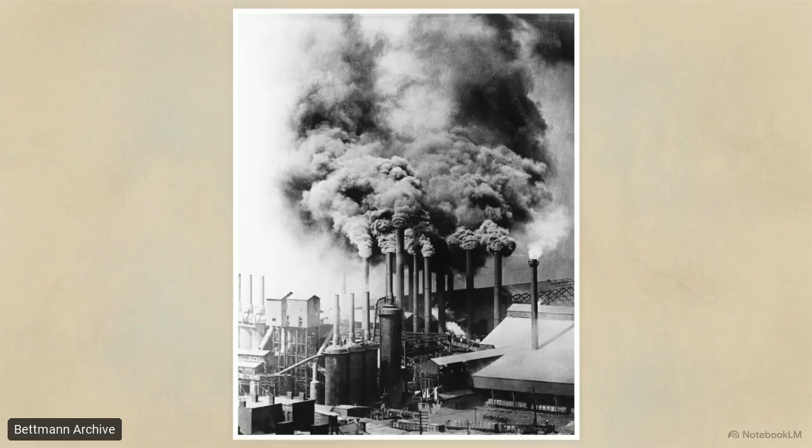For two centuries, building a global industrial power required accepting two massive realities: staggering capital expenditures and severe environmental degradation. It also required locking entire economies into fragile, centralized shipping networks, where a single delay at a major port could ripple across the globe. Additive manufacturing offers a different route.

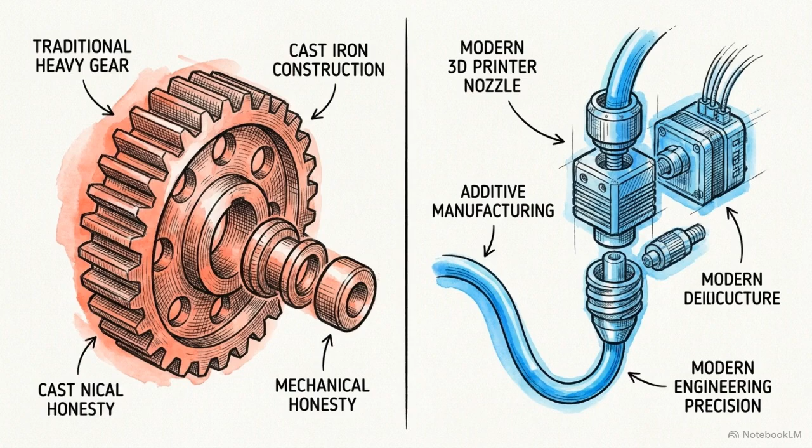By shifting from physical machining to digital to physical fabrication, African nations can leapfrog the heavy capital requirements of 20th century legacy infrastructure. Instead of relying on a single, centralized hub pushing goods across vulnerable oceanic trade routes, production can be distributed into localized nodes right where the demand exists.

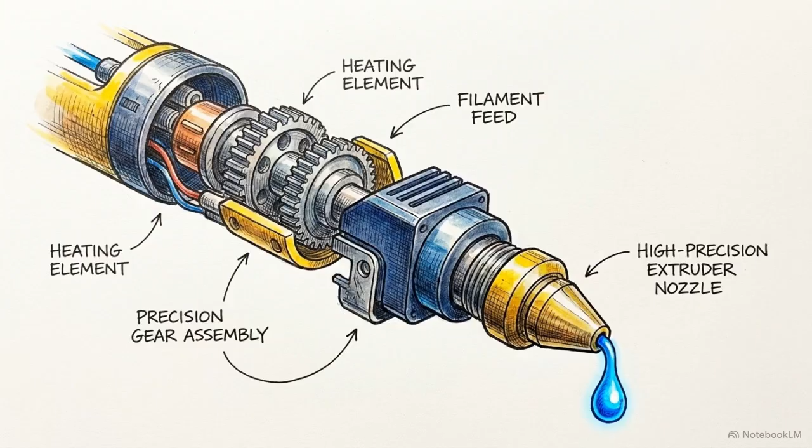There is, however, a catch. Deploying a fleet of robotic extruders or metal powder bed fusion machines accomplishes nothing without a workforce actually capable of mastering digital design and systems engineering. Hardware procurement cannot buy industrial sovereignty. That requires a systemic recalibration of how an entire generation learns to solve problems.

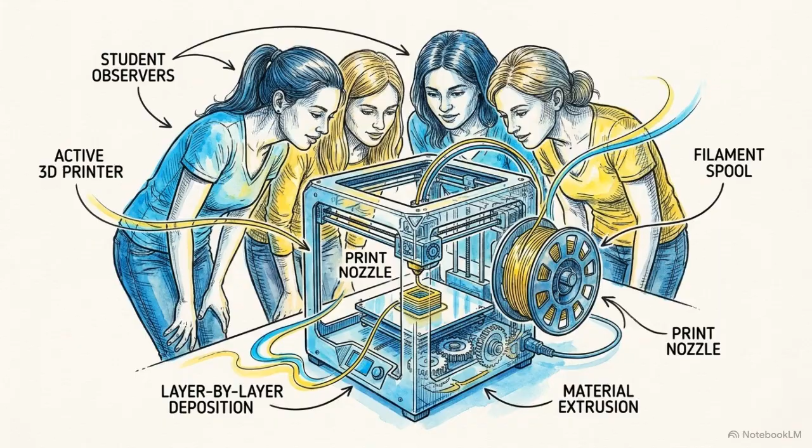That recalibration is starting at the grassroots level, in places like Nairobi, Kenya. At the Lavington Girls' School Unity Art Club, students are getting early, direct exposure to 3D printing technology. The pedagogical goal here is highly specific: to collapse the distance between a fluid, abstract idea in a sketchbook and a tangible, physical object you can hold in your hand.

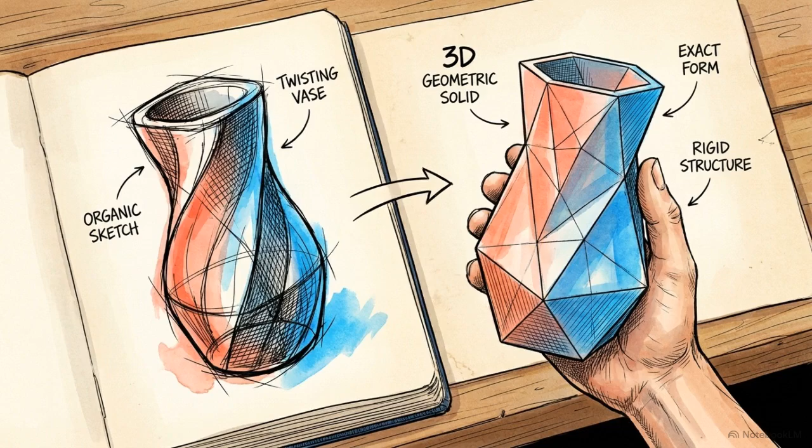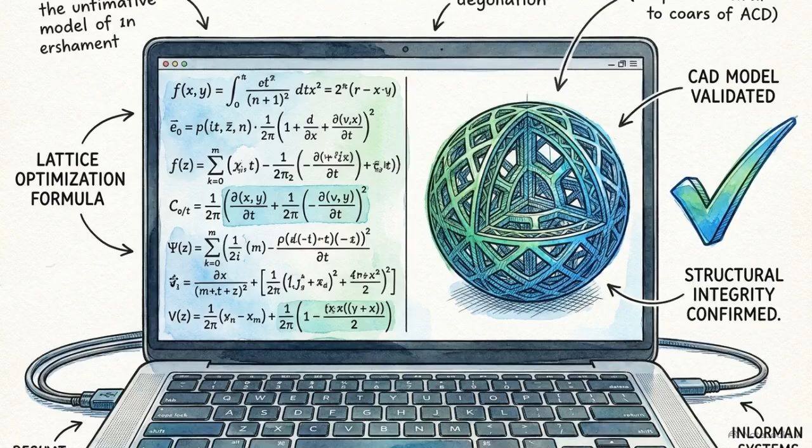When you can print what you draw, what used to be considered an impossible geometry is no longer a barrier. It becomes an engineering constraint, waiting for an optimized mathematical solution.

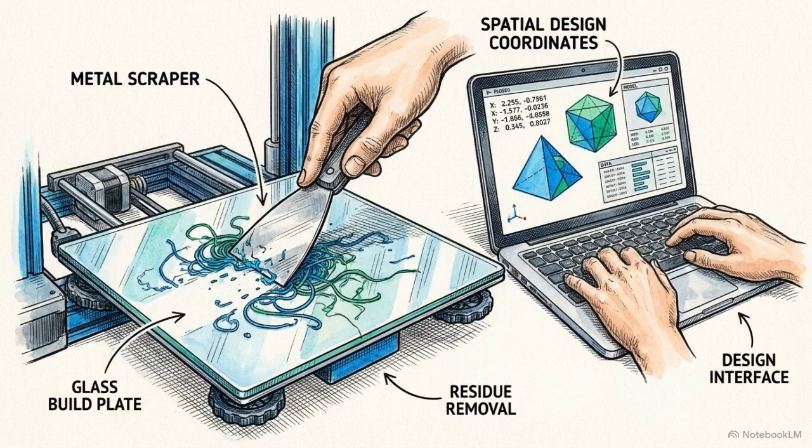This educational approach mirrors the Stoic concept of amor fati, a willing embrace of the chaotic, iterative process of creation. It teaches youth to expect failure and use it as a necessary step to refine a design. Early exposure to this continuous cycle builds advanced spatial reasoning. These students bypass basic machine operation and directly learn the algorithmic thinking required to actively shape their own environments.

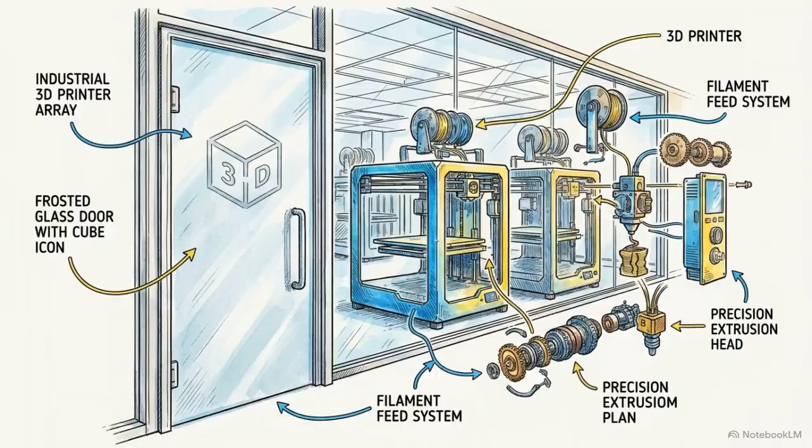This grassroots mindset is scaling rapidly through formal institutional capacity. Strathmore University's iLab Africa Research Center has made major financial investments in 3D infrastructure, running intensive, multi-week courses in digital modeling and design. These university programs function as direct pipelines, equipping students with the technical foundation to launch commercial hardware startups.

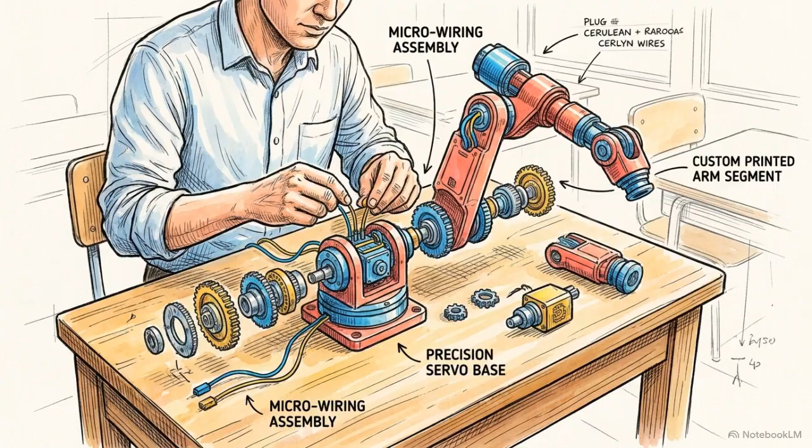Similar integration is happening in younger core STEM offerings, with institutions like Sabis International School weaving robotics and 3D printing directly into their daily curricula. Academic infrastructure relies on a broader ecosystem.

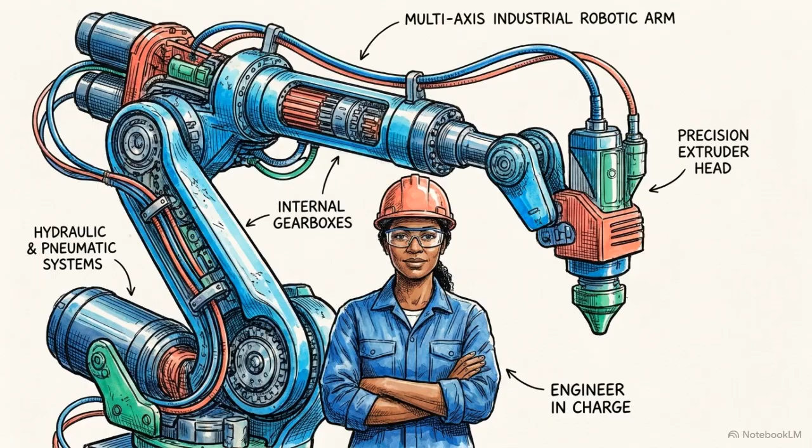Through the triple helix model, these nations are intertwining academic research with supportive government policy and aggressive industrial application. The academic strand is already producing rigorous output, particularly from established hubs in South Africa like Wits University and the Central University of Technology. By embedding additive manufacturing laboratories at every educational tier, the continent is systematically building a highly capable cadre of strategic innovators.

The ultimate payoff of this educational groundwork is the ability to bypass the massive capital bottlenecks of legacy-heavy industry. Designers can apply design for additive manufacturing to process native titanium directly into high-value components for the global aerospace sector.

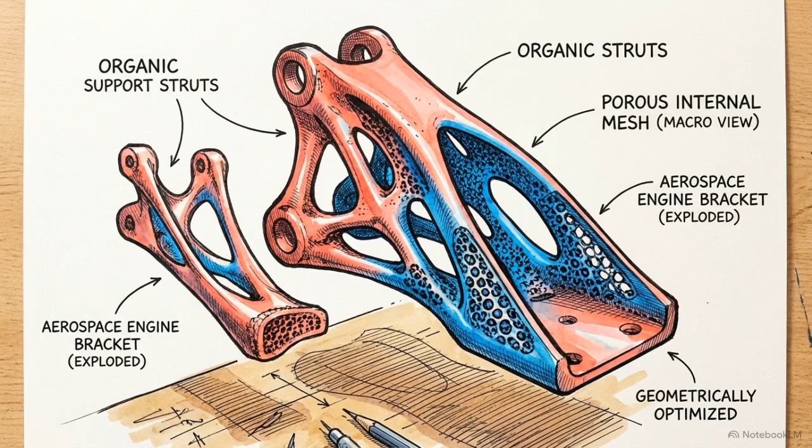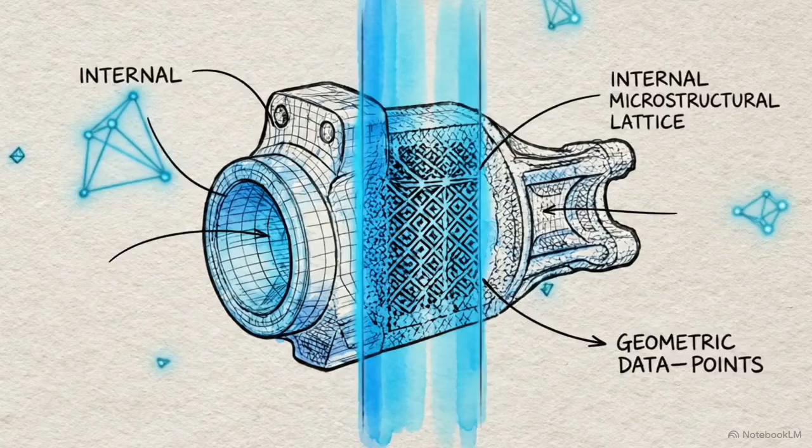Engineers are utilizing advanced digital twins, virtual real-time replicas of physical systems, combined with statistical process control to guarantee the microstructural quality of complex biomedical implants. At the macro scale, operators can deploy rapid 3D concrete printing to systematically address systemic urban housing deficits. Across aerospace, healthcare, and construction, this additive-first blueprint translates local materials and engineering into localized production autonomy.

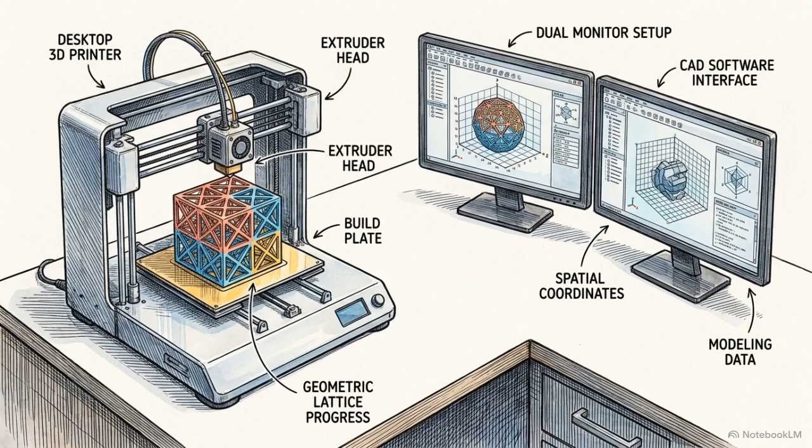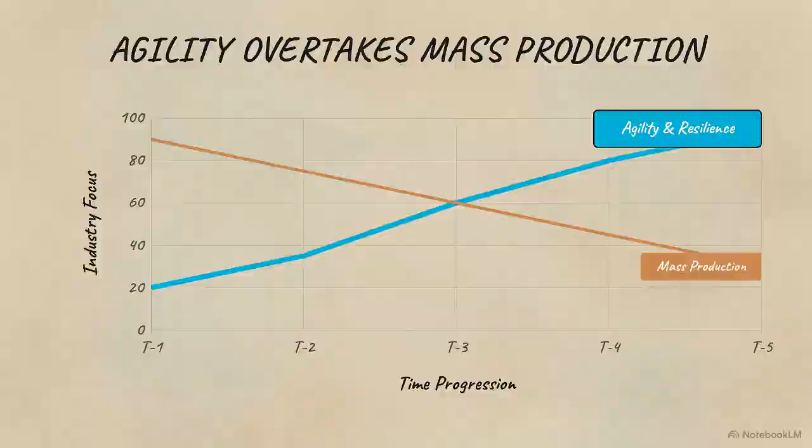The convergence of decreasing hardware costs and highly accessible design software has created a window of kairos, an opportune moment for action. The analytical conversation around global supply chains is shifting away from the sheer speed of mass production. The true advantage now lies in digital agility and decentralized resilience.

By mastering these digital tools and embracing the iterative process of creation from the ground up, African nations are actively writing a self-determined industrial future, one printed layer at a time.